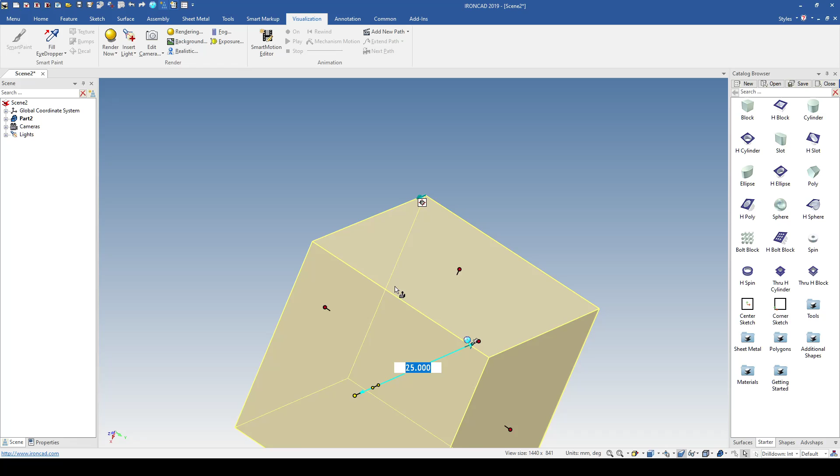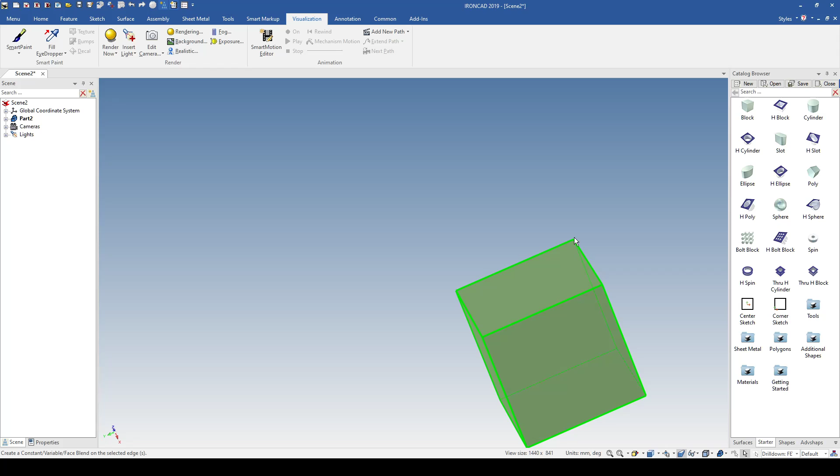Great. What I now want to do is blend a few edges. If we select the surface, hold the shift key down, I can multi-select surfaces. We've got all of them. If I then right click, I can select blend, type in the value of 2 millimeters, and accept that.

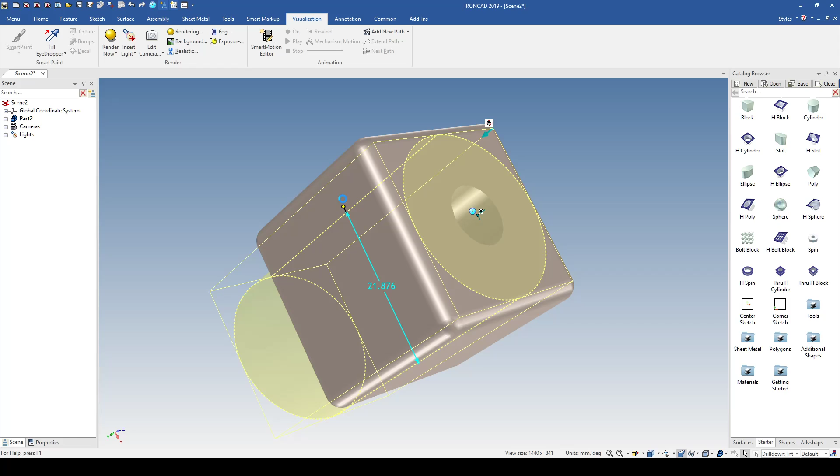And there's our cube. Okay, so what we're now going to do is put a hole in there. So I can drag a hole, drop the hole onto the surface, drag it so that it goes right the way through the cube, and then type in a value for the diameter - for this one I'm going to type in 18. Simple. Okay, so we can put that on there.

Put another one in here. Once again, just snap straight onto the center point, drag that up there, go to 18, and there we go. So we can just drag that right the way through as well.

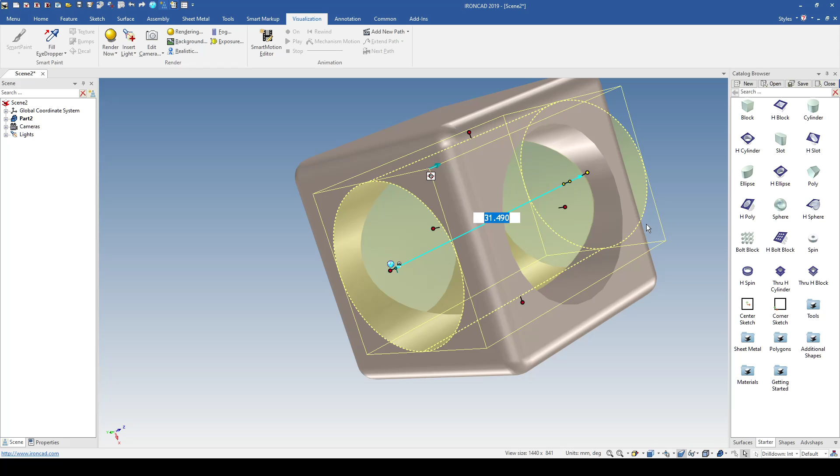And finally, I'm going to put a hole cylinder on the top, drop that on there, right the way through, and change that value to 18. It's starting to look quite good.

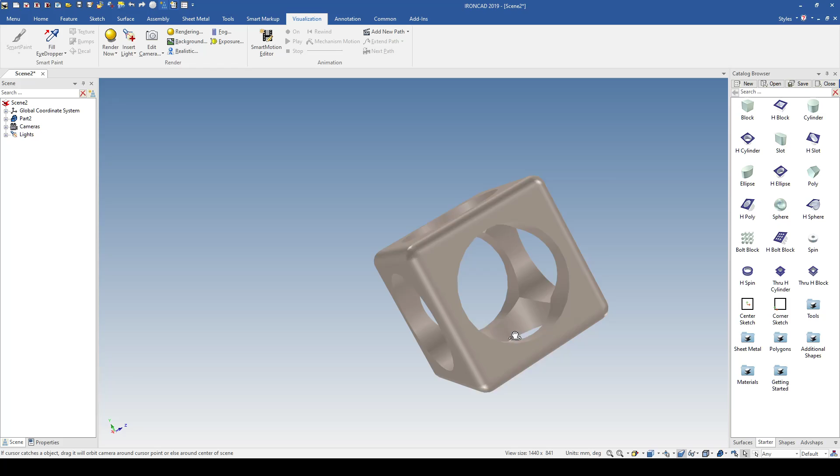Now what I want to do is just put the chamfers on these edges as well. But if I go into my assembly tree here, I've actually got a history tree of what we've created. I could actually just drag the blend that we did earlier and put that after the hole cylinders, and then that'll update it so that that's blended that as well.

We can tidy that up and change the surface. Possibly try that. Actually, even shiny brass might look better. There we go, brass cube.

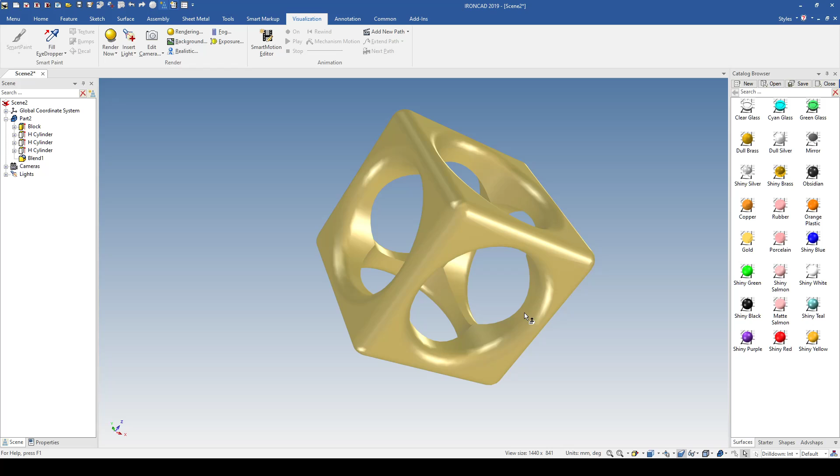There you go. How to use IronCAD in 2 minutes. Hope it's been useful.